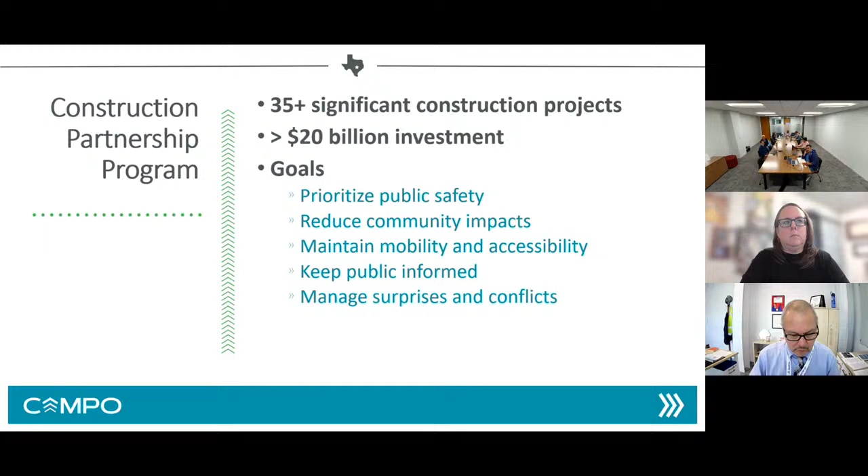The construction partnership program was devised between regional partners to identify ways to prioritize public safety, reduce impacts on the community, and how we can maintain mobility and accessibility while all these unprecedented projects were happening at the same time, and figuring out a way to keep the public informed of which construction projects were happening when and the best ways to navigate through their travel.

There's a number of components that came through the construction partnership program. The three you see here—the construction data platform, the work zone management tool, and the CTX Go mobility app—are designed not just for the traveling public, but for regional agencies as well, to identify ongoing construction projects happening at the same time and coordinate or anticipate work zone activities, avoiding putting the traveling public through more than one construction project at the same time on the same corridor.

A lot of that can be monitored through the CTX Go mobility app, which is available to download right now. There's also a mirroring website available online.

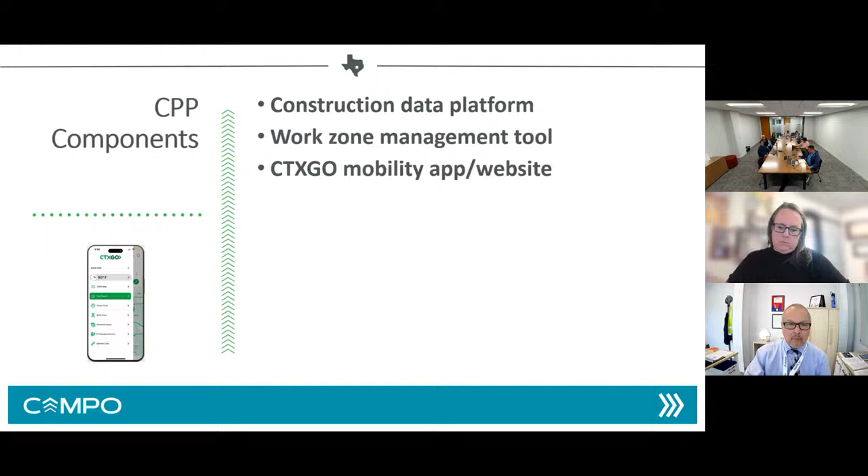And that is my presentation. I'll be happy to answer any questions. Thanks for your time.

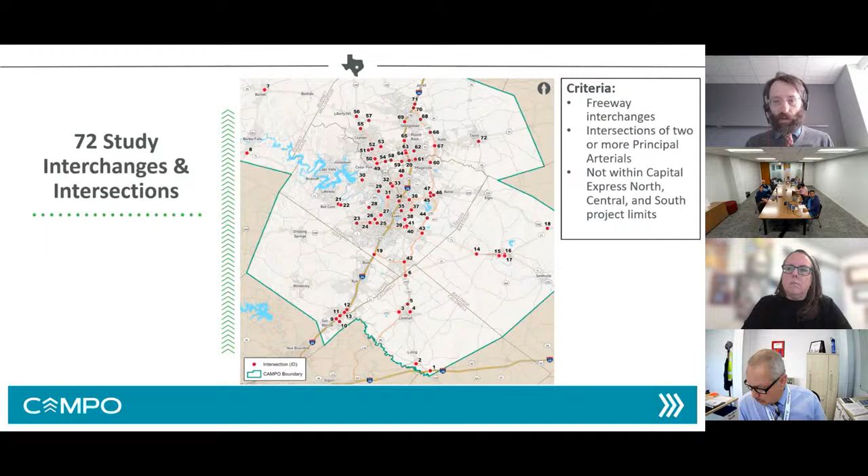We had 72 total study interchanges and intersections. We did exclude I-35 between SH-45 North and Southeast, exclusively due to the ongoing CapEx North, Central, and South projects, since those are already undergoing improvements currently or in the very near future. Next slide.

Through our GIS model, prioritization model, and discussions with stakeholders, which I'll get into in more detail in a second, we prioritized all 72 intersections and identified 4 interchanges to carry forward to concept development at a planning level: SH71 and Riverside in Austin; 2 in San Marcos, I-35 and Wonderworld, and I-35 and State Highway 80; and finally, Mopac and Parmer, the Diamond in Northwest Austin—based on criteria such as fatal crashes, serious injury crashes, and projected future travel demand at those interchanges.

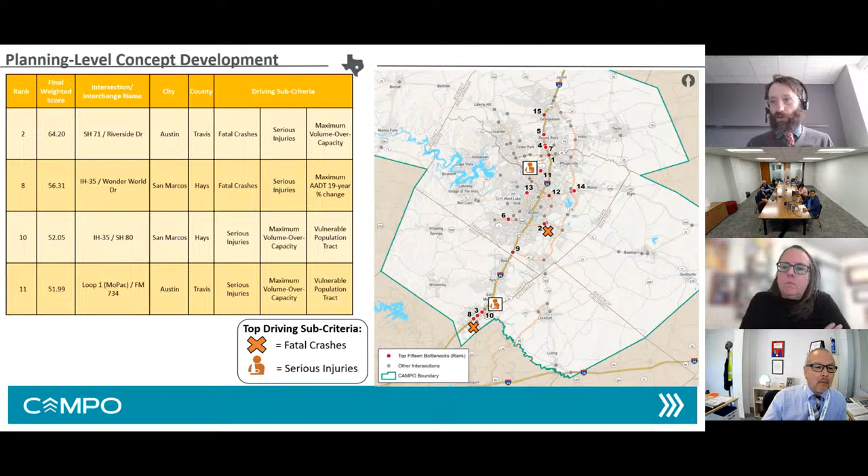Next slide please. So we engaged the stakeholders throughout the process, TxDOT and city agencies. We first conducted a pre-prioritization questionnaire, which asked for feedback on bottleneck locations. We asked about agency experience in implementing innovative intersections, as well as coordinating with stakeholders in the community. We also had post-prioritization meetings with TxDOT, City of Austin, and City of San Marcos to gain feedback on needs, as well as our preliminary recommendations, which I'll get to in a second. Next slide.

I'll start with State Highway 71 in Riverside. In the near term, the needs we identified were to address long pedestrian crossing distances, poor pedestrian visibility in certain locations, a lack of bicycle accommodations across the interchange along Riverside, and high vehicle speeds on the frontage roads.

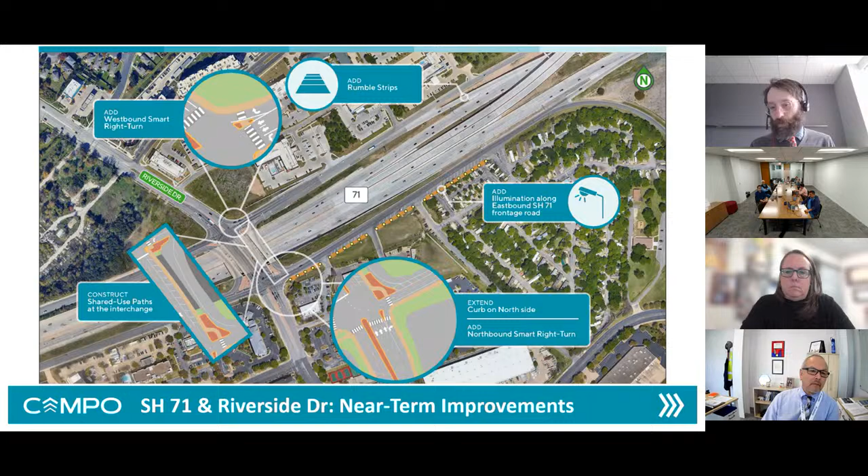Moving down to San Marcos at the I-35 and Wonderworld Diamond interchange. In the near term, we want to address long frontage road queues and delay, which both our traffic analysis and City of San Marcos feedback identified. We also have multiple uncontrolled access points along Wonderworld Drive east of I-35, where our historical crash analysis showed a number of serious crashes that we want to address.

In the long term, we're forecasting significant traffic growth, and our traffic analysis showed significant future forecasted interchange delays. We want to address that, as well as accommodate TxDOT's future plans for I-35 in San Marcos.

Finally, construct a northbound left turn bay on the frontage roads. Currently it's a shared U-turn and left turn movement. We want to separate those movements to decrease delays and reduce instances of queue lanes blocking access to those turn bays.

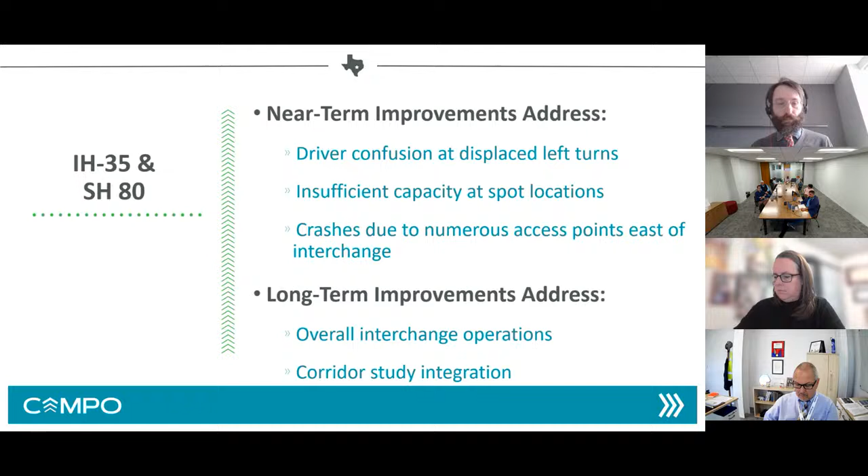We would also like to update the left turn crossover angle, changing the angle of entrance to provide a smoother and more clear transition for drivers turning left, transitioning from the right side of the road to the left side. On the southbound frontage road, where it currently transitions from a 4-lane down to a 3 down to a 2-lane section in a pretty short distance, with the relocated southbound exit ramp we have more distance to increase the merge distance for that 4-to-3-to-2 transition.

Moving to the east side of the interchange, we're recommended to construct a median between the westbound through and westbound left turn lanes to restrict driveway access crossing that westbound through lane trying to get into the westbound left turn lane. We also want to update the left turn crossover angle, similar to what we did on the eastbound side, to the westbound side, again to provide a more natural transition for left turns going from the right side of the road to the left side of the road.

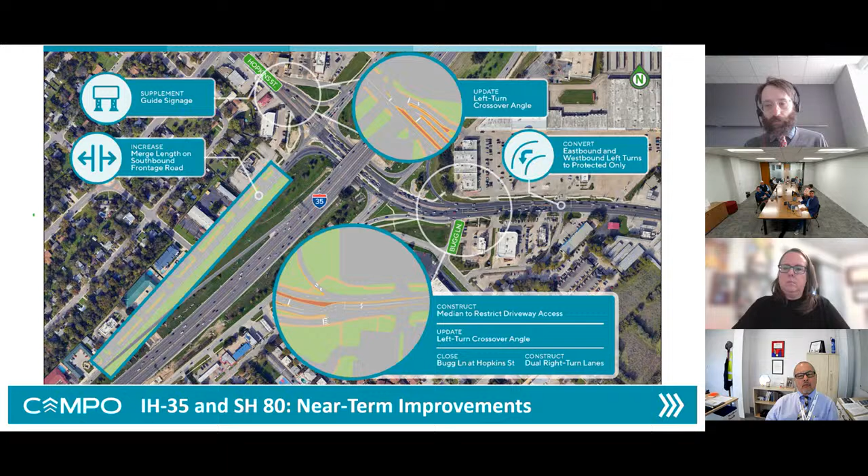Next slide, please. And then the long term, revert back to a traditional diamond, but with more capacity, widening SH80 to 6 lanes, as well as providing additional turn bay capacity on the frontage roads.

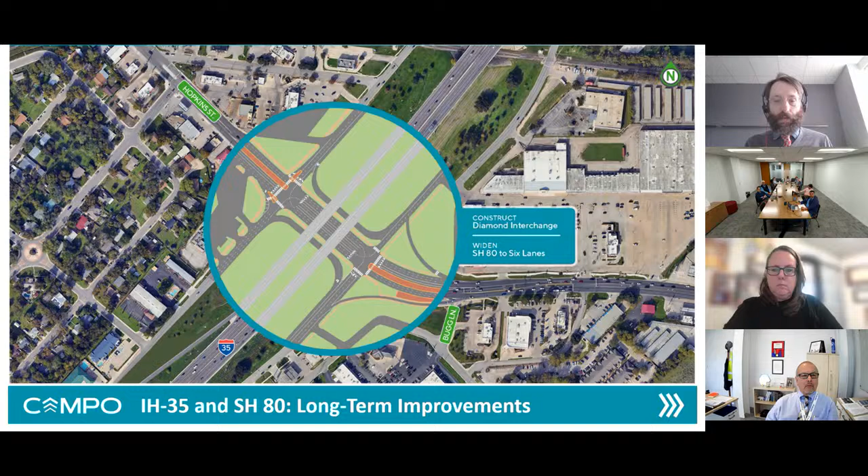Next slide, please. And finally, at Mopac and Parmer, in the near term, we want to address both pedestrian and bicycle safety, as well as operations on the northbound frontage road, which is a very heavy approach during the PM peak period. In the long term, we want to accommodate forecasted traffic growth, especially with plans for the Parmer Lane corridor as a whole to the east and the west, as well as address the overall interchange delay that we forecasted with our traffic analysis, especially the northbound to westbound movement, which is quite heavy.

Next slide, please. So our near-term improvements are shown here. I'll start on the top left. Currently, there's an eastbound bicycle lane shared with vehicular traffic. There are conflicts between the eastbound through, eastbound right turns, and bicycles. So in coordination with the City of Austin, we're proposing to relocate bicycle traffic to an SUP, a shared use path.

And also we want to add a pedestrian signal where that eastbound right turn lane intersects with the pedestrian crossing. It would be a signal that rests in green except when a pedestrian actuates the signal, at which point the pedestrian would cross at a protected movement.

Due to the high speeds on all approaches, as well as some vertical curvature, we want to convert the existing span wire to mast arms, as well as add supplemental signal heads to improve safety.

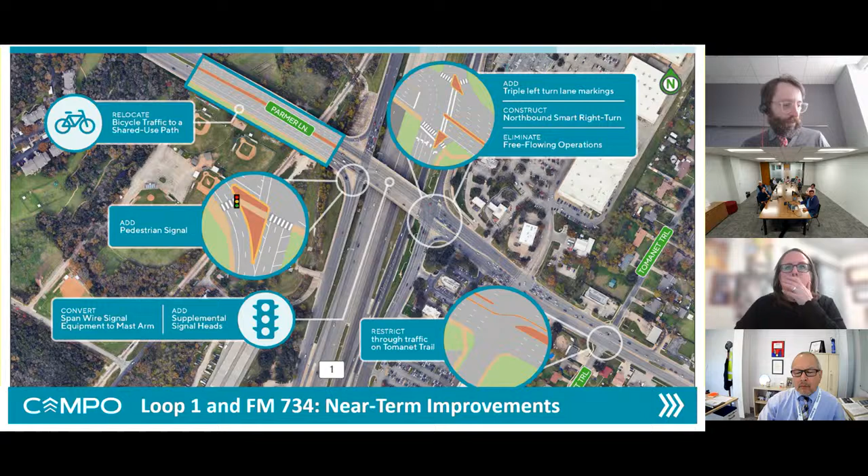Next slide, please. And then the long term: widen the diamond intersection, diamond interchange, construct northbound and southbound turnarounds, and a northbound to westbound direct connector, again to accommodate the heavy forecasted traffic demand there.

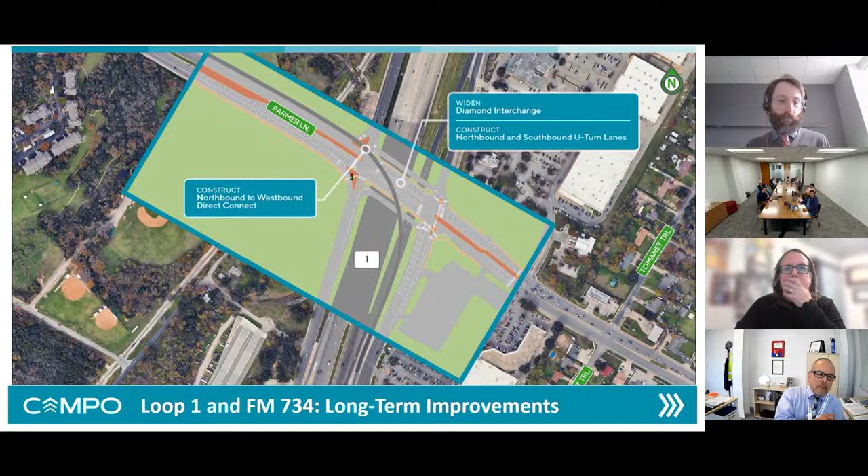Next slide, please. So our next steps: develop preliminary cost estimates, finalize the recommendations, and submit a final report in the next 5 or so weeks. If there's time, I'll take any questions.

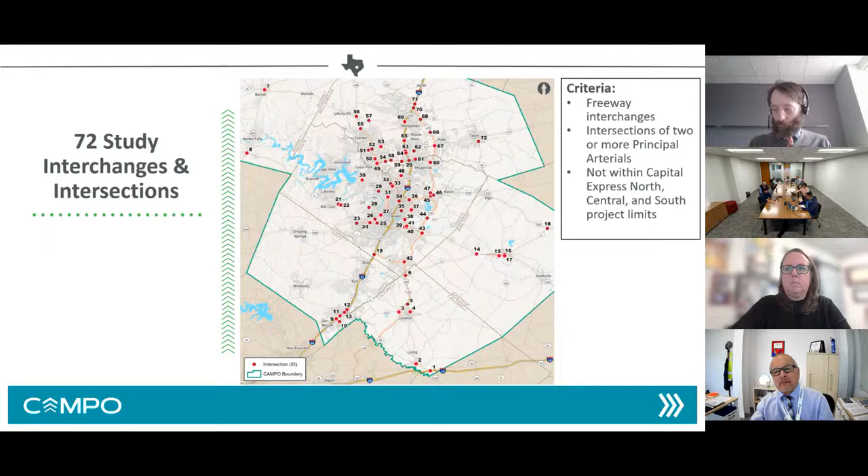Okay, any other questions? Okay, now we'll move to item 8. Oh, Charlie. There we go, no problem.

So what is the next step actually for the bottleneck study? Are we going to get a draft to look at before we make a recommendation, or are we going to be asked for a recommendation? What's the process for the TAC? That's a good question, Charlie.

I don't believe we are asking for a recommendation. We're going to present the results to the board. Ashby, do you think we will be asking for adoption of that from the board? Yeah, so Charlie, probably once we get everything finalized here, we come back to TAC again, and then ask for a recommendation and go to the board and ask the board to accept the study. All right, thanks.

Okay, anybody else? Okay, maybe third time's a charm. We'll go to item 8 now.

Discussion on Breaker Lane North funding and scope change. Thank you, Emily. So this item is the Breaker Lane North project that we discussed at the policy board. We discussed this at the policy board last month, and they requested we bring it back to you all for discussion to talk about the various options available for the board to take action on. To give a quick overview, the Breaker Lane North project is one of our older projects. It was awarded in December 2011 to both Travis County and the City of Austin, for approximately just over $1 million between the two awards to take the Breaker Lane North section to 100% design. It's currently under discussion to determine the appropriate path forward.

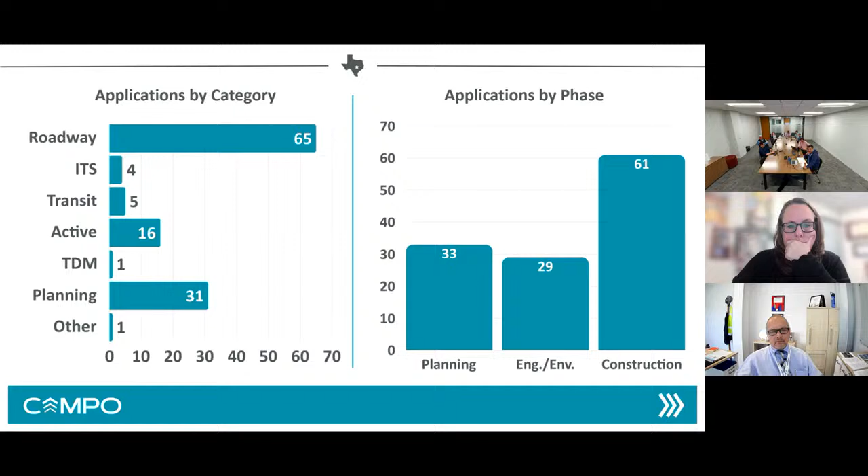So just to give you all a quick update on what we received: we did receive 123 applications. This is the breakdown by category. The majority of the projects we received are roadway projects, with 65, 4 for ITS. We did receive 5 transit projects, 16 active transportation, 1 TDM program request, 31 planning studies, as well as another category. And by phase, we have 33 in the planning phase, 29 in engineering and environmental, and 61 in construction.

As far as our review process is going, we have basically 3 independent reviewers doing readiness on each application, and 3 independent reviewers doing the benefit evaluation. We also have our modeling team doing the modeling concurrently so we can beat that 8-week schedule. So we are deep into that, and that's really just a high level update. If anybody has any questions about the review process or how that's going, please let me know. We'll definitely be providing an update in the next TAC meeting as we go through the review process, if there are any major updates there. So thank you.

Awesome, thank you Ryan. Anyone have any questions or comments to share on this item? Okay, not seeing any hands.

Okay, we'll go to item 10, briefing on the Integrated Infrastructure Consortium concept. Thank you. So before I get too far into this, this is just an idea at this point. Nothing committed to on anybody's part.